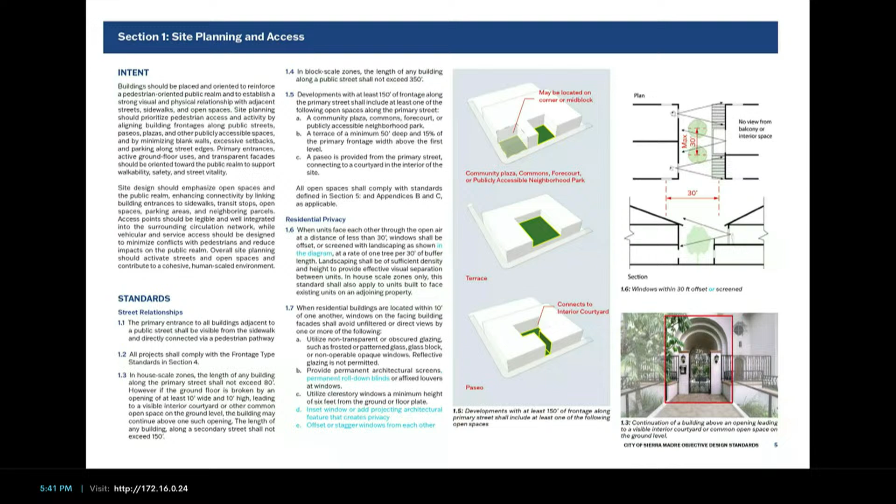Any questions? I think that's an elegant solution. Thank you. Good.

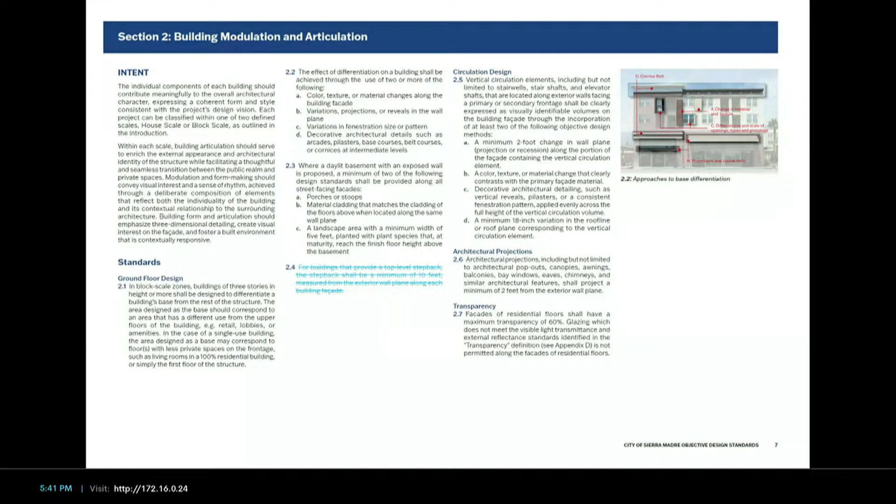Okay, so on to section 2, building modulation articulation. On this page here, we removed the step back, the minimum 10 feet if a step back was provided. So that's been eliminated.

And then on this page, okay, so 2.8 there now says: minimum of 1 variation in wall plane depth within a block scale zone for every 50 feet of facade length along the street. This is in response to your overall comments about length, width, and depth, and it not being clear in all circumstances what dimension is referred to by the length, what dimension is referred to by the width, what dimension is referred to by the depth.

We tried a few different ways of trying to solve this. We tried to first create definitions for each of them, but I'll say, even though it seems like it should be very straightforward, it's really not. So the best strategy we arrived at was simply to add clarifying language everywhere a dimension is referred to that might possibly be unclear. So in this case, it's 'every 50 feet of facade length along the street.'

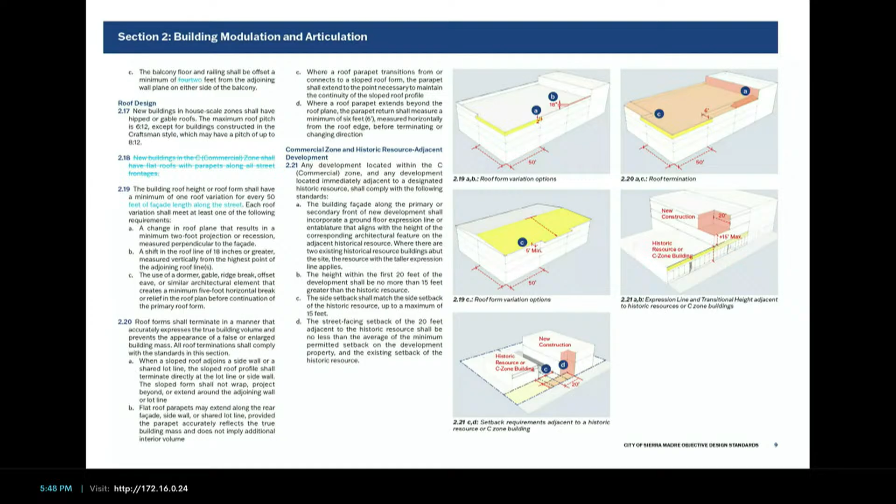2.18 removed the flat roofs from the commercial zone—that's clear direction from you. 2.19 is a length, width, depth comment.

And in section 3 here, 3.8D, there's discussion about composite materials that mimic a natural material. We removed that standard in general—we removed the relationship prohibiting materials that imitate natural materials. So now this is purely about material, and it prohibits vinyl siding and EPS panels.

Eric, I'm not sure if there's anything else you want to say on that. No, other than—yeah, so the two materials identified, the reason we're recommending to keep those is because over their lifetime they're prone to cracking, fading, and deterioration, as opposed to composite materials, as mentioned during the last meeting. We know composite is a more common material nowadays for siding and those types of wall cladding. Great, thank you.

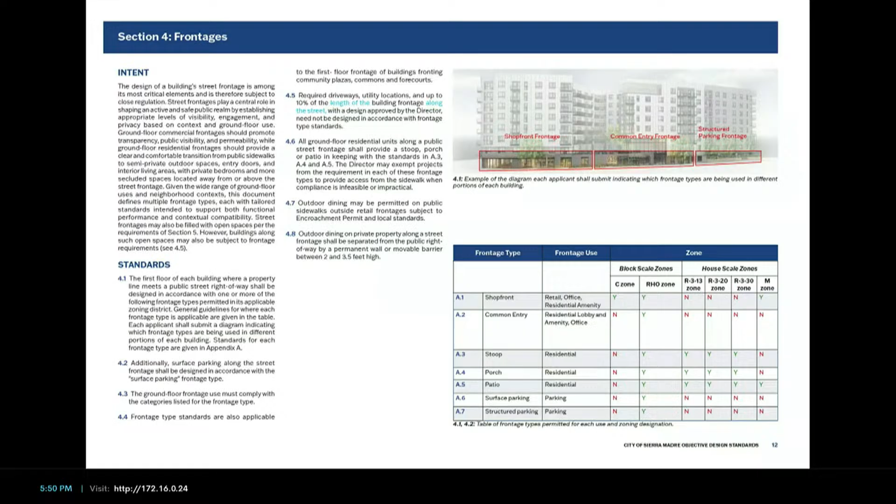Well, don't go anywhere, because we're probably going to start asking you questions. Yeah, so I guess 4.7 is my first question, unless somebody has a question before 4.7.

Give me one minute, because I'm flipping back between notes and the presentation. So I'll ask my question while you're getting that ready.

Yeah, go ahead. Okay, so this is actually for staff. It says outdoor dining may be permitted on public sidewalks, outside retail frontages, subject to encroachment permit and local standards. What does it take today to put a dining area out, like the one in front of the pizza place, or Emmy's, or Monsieur Crepe?

Those vary in types. The ones in front of Casa del Rey and Nano Cafe were all permitted under the Sierra Madre CARES Act and made permanent, but they're no longer available. For outdoor dining in front of other places like Monsieur Crepe, those can be permitted through the encroachment permit, and we do have an outdoor dining program for that. So it's basically you commit to keeping the area clean and you get a permit. Yes, okay, great.

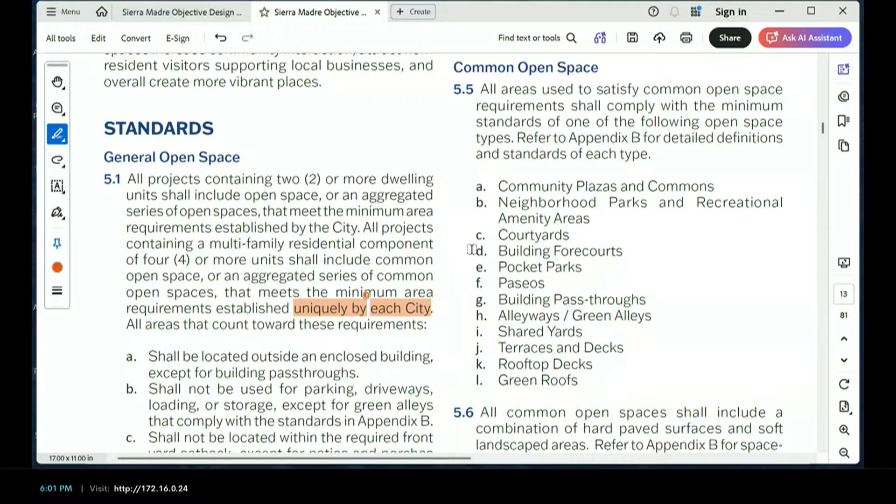5.10 is my next one. I have one for 5.2. It says all open spaces that count towards the minimum area requirements in 9.1. I went to 9.1, and that's about commercial loading. It's updated in the new version, sorry.

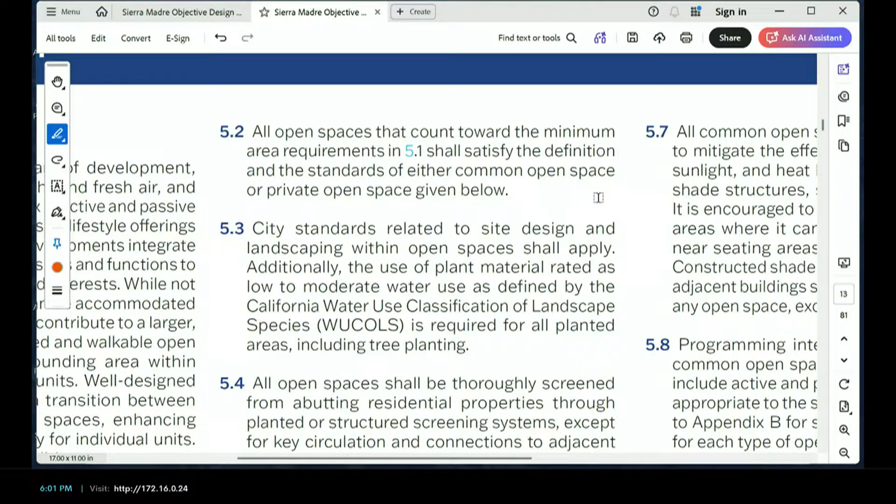Again just a formatting and consistency issue, and I did not double check myself on this, but in 5.1A I'm not sure we're consistent, but I'll throw it out. I think in the appendix we have defined terms, and I'm used to seeing defined terms capitalized in our documents. I know there's a separate ODS document, but I think pass-throughs is a defined term. I didn't go through the rest of the document to figure out where things were defined or not.

I'm newer to the commission, but I think we tried to do that. I remember it being the other way, honestly. Is it the other way? I'm like, why isn't that capitalized? I wish it was, but it isn't. Historically our code does not recapitalize definitions. Okay, I retract my statement. I've been wanting to change that forever.

It's somewhere in 5.10, I think we may have reversed that. It says no more than 25% of the overall common space shall satisfy, but then in house scale zones, at least 25% of the overall common open space area requirements must be met through ground level open spaces. But in house scale zones there would be almost no rooftops or non-ground level open space, so I think maybe that's supposed to be 75%, not 25%.

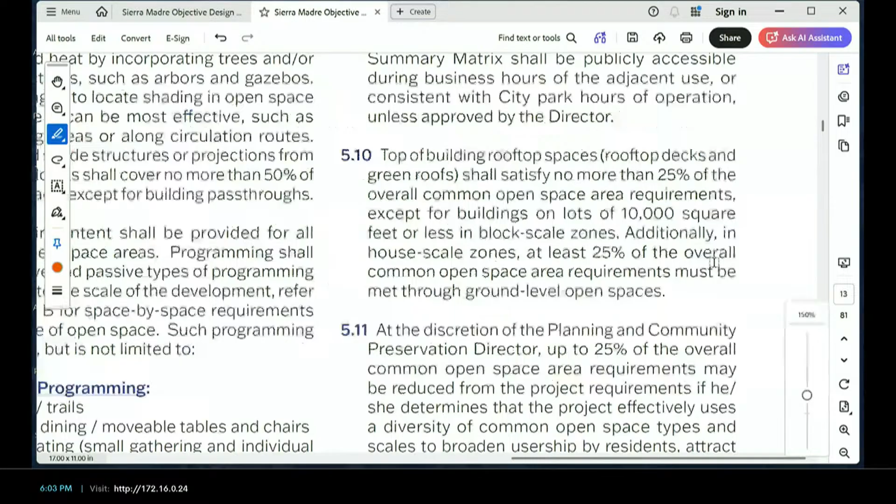Well, you could, in house scale zones, if you go to the next page you can see which open space types are allowed in house scale zones. You can still have balconies in house scale zones, terraces, decks, rooftop decks, green roofs. So I certainly get your point, and I'm certainly willing to consider changing that, but it does reflect our recommendation.

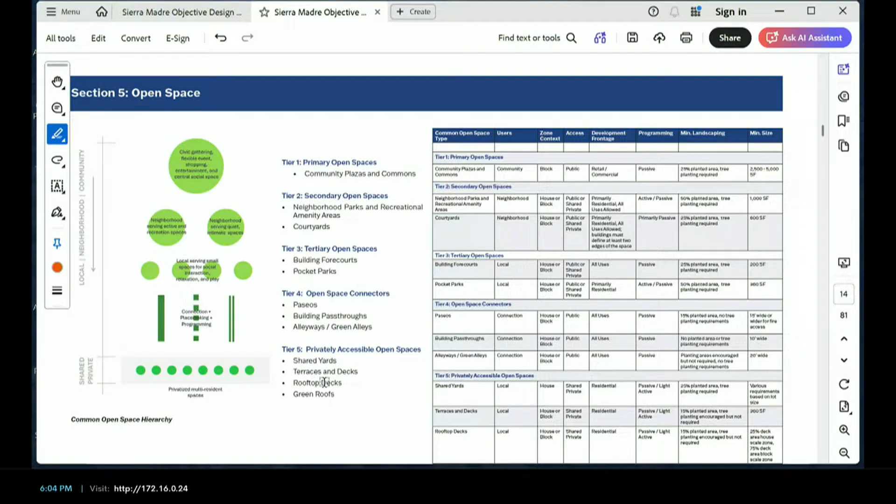So if you have 500 square feet per unit as your open space requirement, 125 square feet per unit needs to be on the ground level.

That feels backwards, so what you're saying is for 500 square feet of open space requirement per unit, that means you could have balcony space for 375 feet of it?

Or, I'm not sure you'd have this type of building here, but let's say you're in the R330 zone, building at 30 units an acre, maybe it's a density bonus project and you're building 40 units an acre. Could be a podium project. You could have a podium deck for 375 square feet of common open space, and then 125 square feet on the ground in the front as a ground level courtyard.

Does that 500 feet per unit apply when there's a density bonus and high density building?

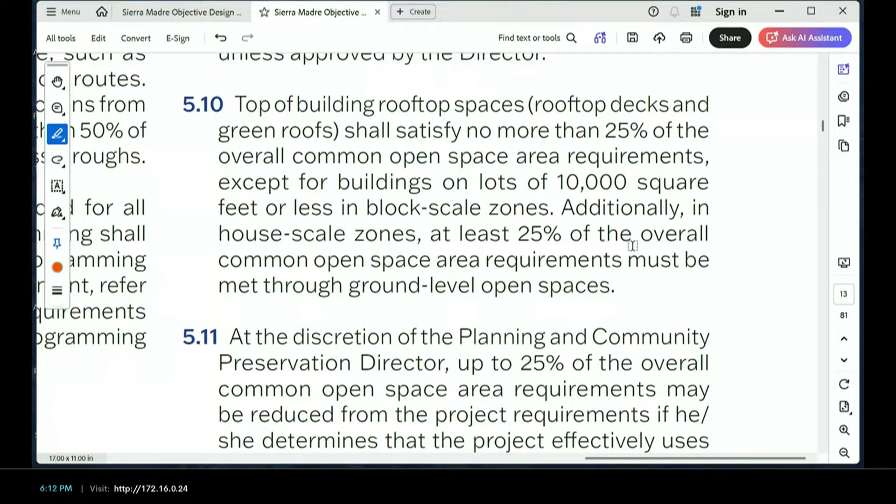And then what percentage do you recommend? I would like 50. That sounds good to me if we can. If we're good with doing that. I think so.

So that would relax the current standard from R320 and R330, because you could say R320 and R330 currently require 100% - under the municipal code, they require 100% of the open space requirement to be met on the ground level.

So basically, on the first part, we're saying if you have a small lot or a big giant block scale zone, then you have to have 75% on the ground, right? And if you have a medium-sized one, we're putting 50 on the ground. It seems kind of strange to me that if you have a really small lot, 75% has to be on the ground.

Then the middle size is 50, but then the big size is 25 or 75 again. Seems like it should be a line, not a hump. Does that make sense?

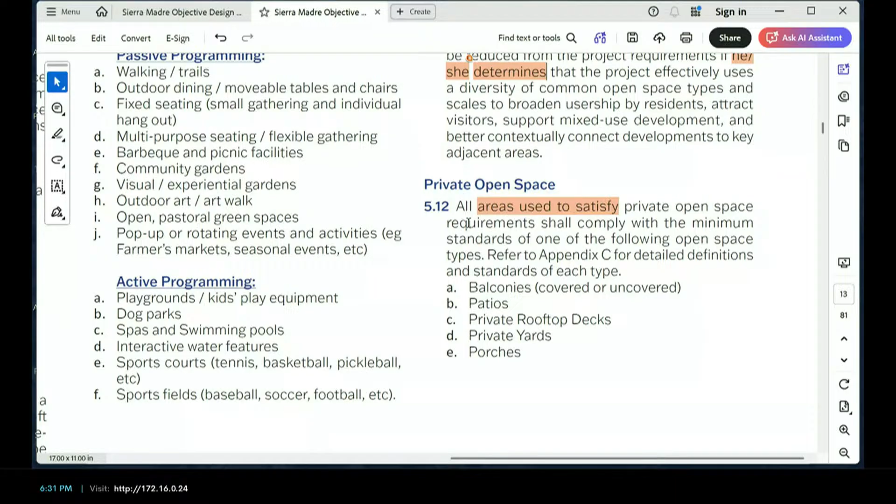Joshua, are there... I guess that would cover it, yeah. Even if there are private open space requirements in block scale zones, that would still cover it. I think we're covered there. 6 is my next one, 6.3 is my next one.

Can you help me understand what 6.3 is trying to get at? Yeah, 6.3 is trying to encourage individual unit entries that are located along a pedestrian network connected to the street. So what it is not allowing is ground floor units being accessed through an interior hallway, double loaded corridor on the ground floor. But it says internal pedestrian walkway, so wouldn't that mean that you can take a walkway to the internal pedestrian walkway and then access it? Yeah, well, it says the intent is outdoor, so landscaped internal to the site.

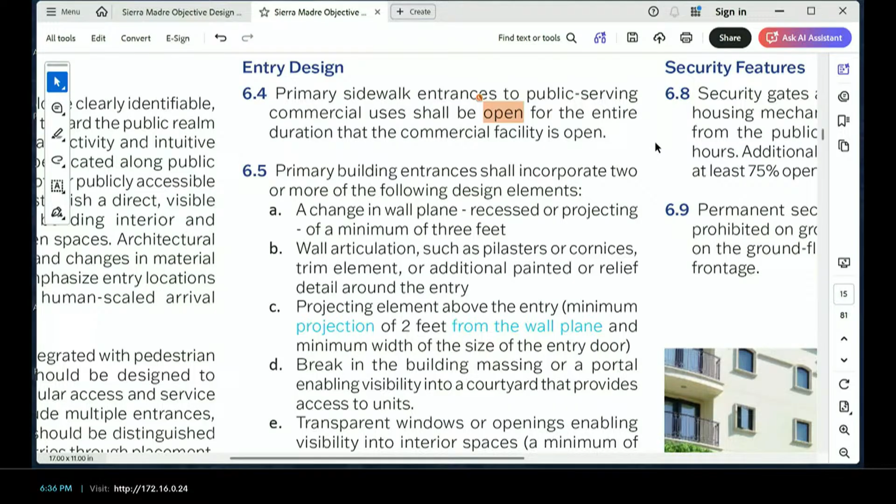I had a question about 6.5E, unless we have something before that. For all of 6.5, it felt like this was for non-house scale. Because I'm trying to understand how you would have more than one of these in a house scale?

You want to take that one? So let me just briefly go through each one of these. Change in wall plane, recess projection, minimum of 3 feet, wall articulations such as pilasters or cornices, trim elements, or additional painted or relief detail around the entry.

So let me go on. Projecting elements above the entry, a minimum projection of 2 feet from the wall plane and a minimum width of the size of the entry door.

Break in the building massing or a portal enabling visibility into the courtyard that provides access to units, transparent windows or openings enabling visibility into interior spaces, a minimum of 50% within 20 feet of the entrance, and a landing deck or stoop with a minimum depth of 6 feet and minimum width of 8 feet.

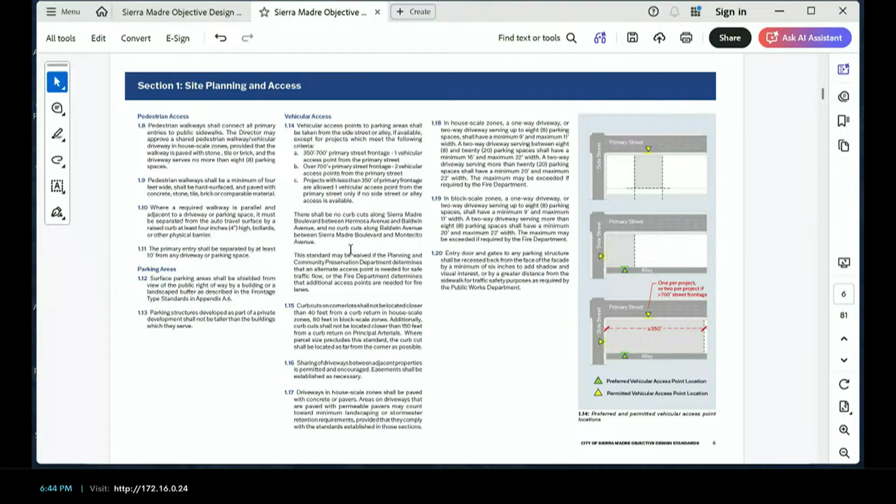How would we phrase that? We'd call it some kind of frontage? I think actually in section 1 there's already a standard that talks about the primary entrance: the primary entrance to all buildings adjacent to a public street shall be visible from the sidewalk and directly connected via pedestrian pathway. It's 1.1, so that's already saying what it is.

So the question then becomes, I don't know what code governs having doors unlocked. I don't think we have such a code. That sounds like a fire code, a safety requirement. Yeah, I'd leave that to the fire department because that sounds like something that would exist under the fire code.

So would it be prudent to say open, as in transparent and not obscured? I think that's already in there based on the transparency guides, right? Yes, the intent here is that it be accessible to the public, accessible as a public entryway.

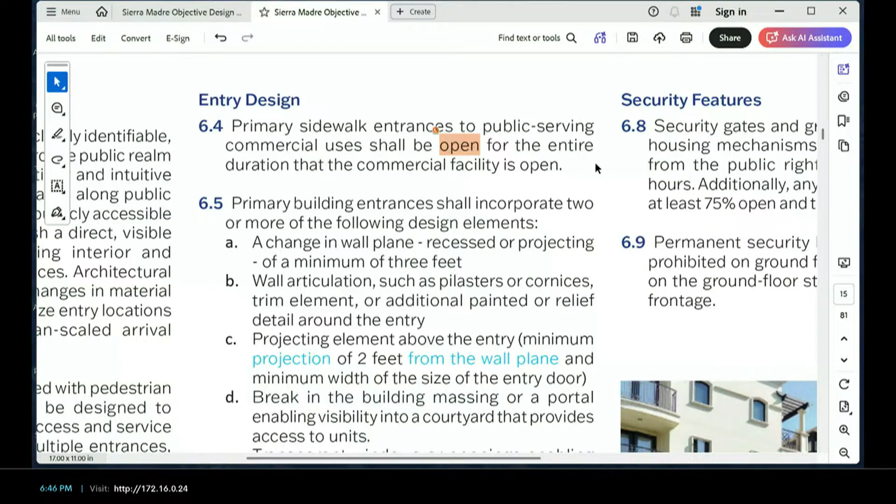Commissioner Brennan, I think you had some questions? It was actually to that point, 6.5E, the portion in parens. Maybe it's just me, but where it says a minimum of 50%, I didn't know what the 50% was referring to. We're trying to have transparency into the interior space, in the entryway, but 50% of what?

I was trying to see, it's 50%, 50% of the facade, or the ground floor facade? So it's defined in the same way in other parts of this, in the frontage standards where it talks about a minimum transparency, and there's a definition for that in the definitions section. The intent here is to use that same definition here.

Is that clear without any other context? Maybe it's just me. It may just need to say a minimum 50% transparency. If you had the question, I think we should clarify it, right? I would say a minimum of 50% transparency of the facade within... okay, thank you.

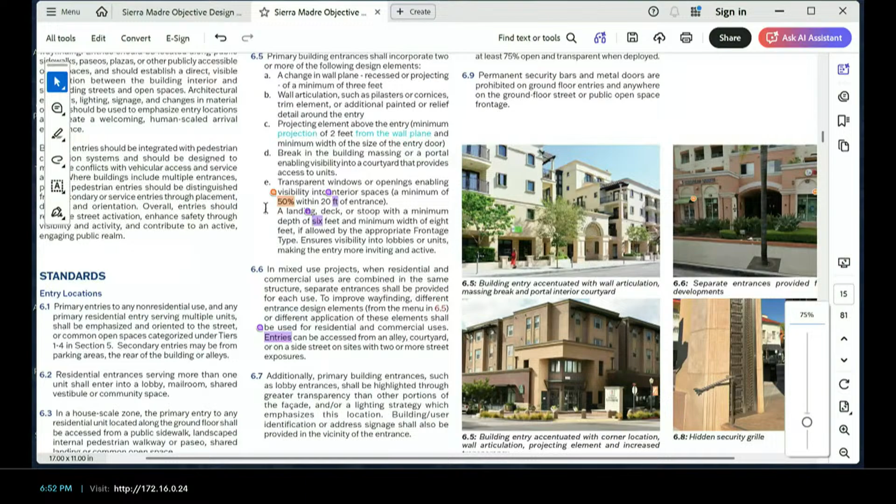I don't think landing or deck have exhibits of their own, but stoop does, so I would just make sure that doesn't conflict. Yeah, those are actually larger than the minimums for the stoop. It's not larger than the maximums, but I think the intent was to make it more pronounced.

That's probably more of a block scale thing, thinking about an entry, like a lobby entry into multiple units. If we're thinking of house scale zones, just single unit entries, I agree that just complying with the standard, the frontage standard, is sufficient.

I guess it's just one of the many things you have to incorporate. If you don't incorporate that, you find another one, so it's not that important. I withdraw my question.

6.8, security features. Is a privacy screen in the house scale considered a security feature? Because it says security gates, and I think of those privacy screens as kind of gates, but I just wanted to get clarity.

Like a screen on the window? No, I think they're called security screens. I don't know what they're called, but they're like reinforced metal, not like a screen door. It's super thick, and it has a lock on it so you can leave the door open and nobody can come in. They usually have a deadbolt and a metal frame that reinforces it. So is that considered a security gate?

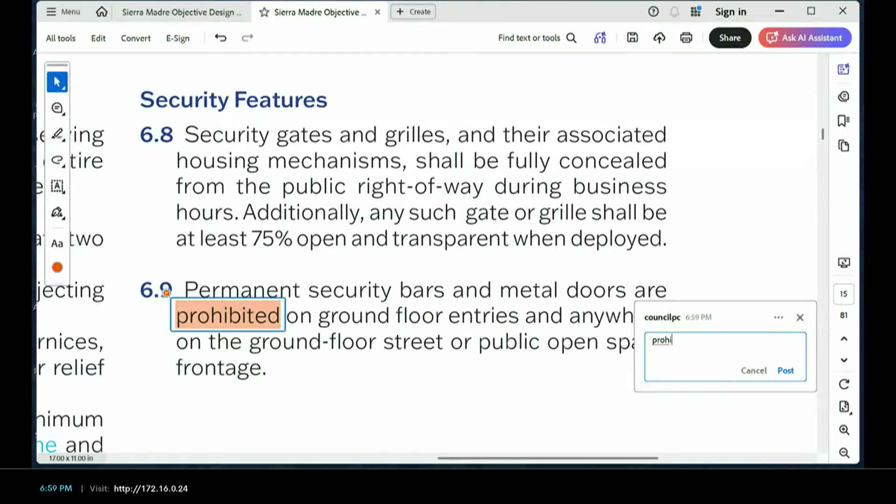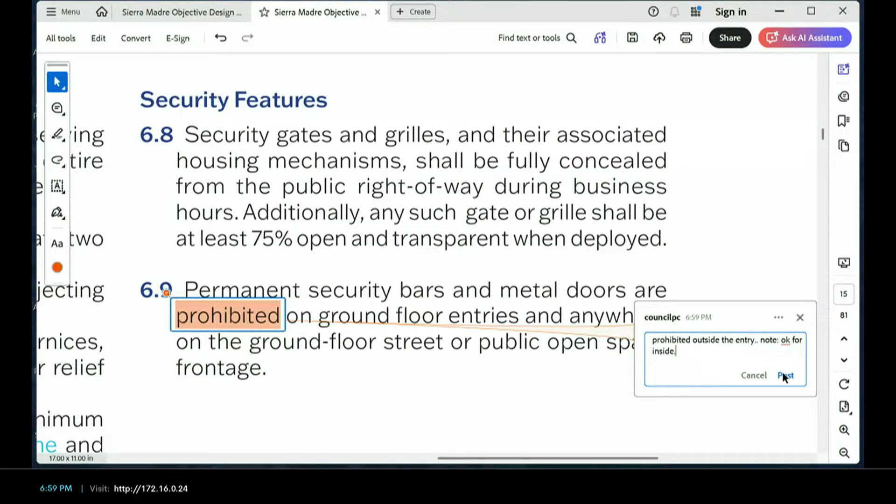Seven two B is my next one. Is this just a standard that people use? Is there some logic behind it? Why would we allow any of it to be pointed up?

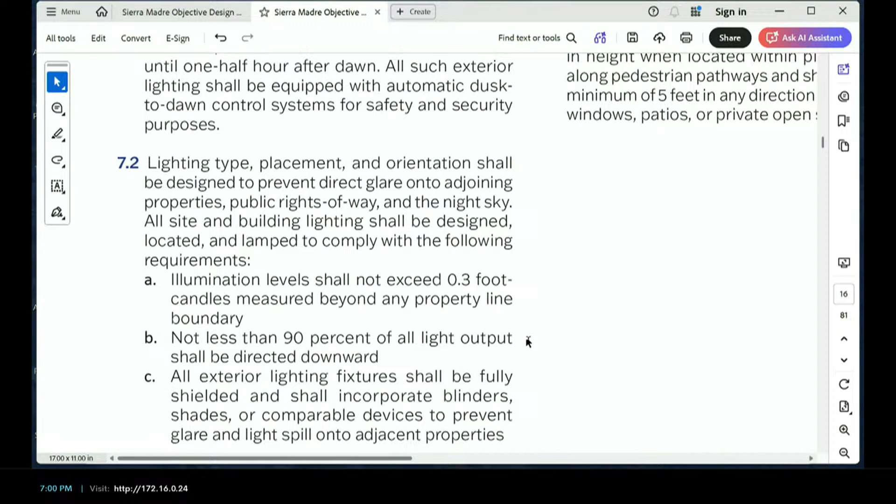Well, it's hard to determine that there is zero, that you cannot see any light from an exterior light, even as it looks in the diagram. So I think that was the idea there. It's just trying to be - when people write a simpler standard of all light shall be directed downward, is it really 100% effective? Not sure about that. Is this the standard, the 1 to 3 foot candles?

Is that like a standard somewhere? And how would we enforce that, is that an enforceable number with like a machine, a meter? Is there a foot candle meter?

Typically with new construction residential, there's a photometric diagram that's made for the project to ensure that light is emitting on pathways to entrances, and the electrical engineer will have to develop that. Typically, the minimum requirement is 1 foot candle, as far as our research goes, we've determined.

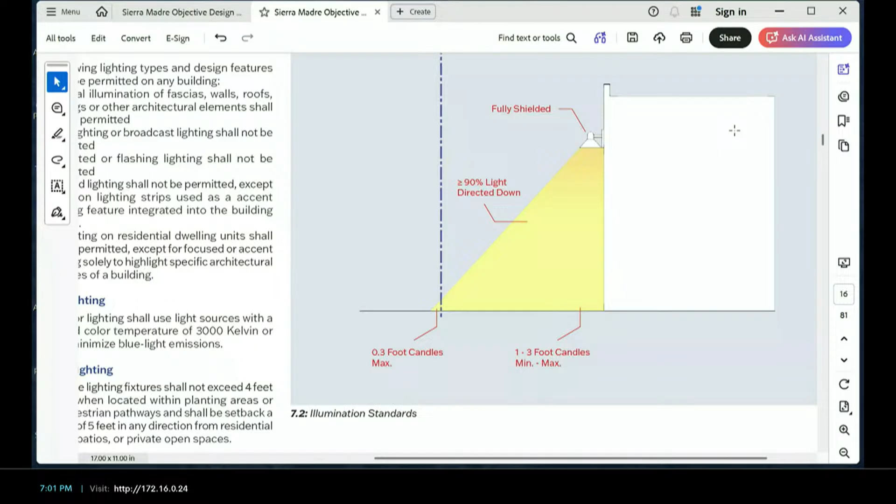I mean, if this is a standard - I tried to figure it out and I got lost. So if this is just a standard calculation or a standard procedure, I don't measure foot candles often.

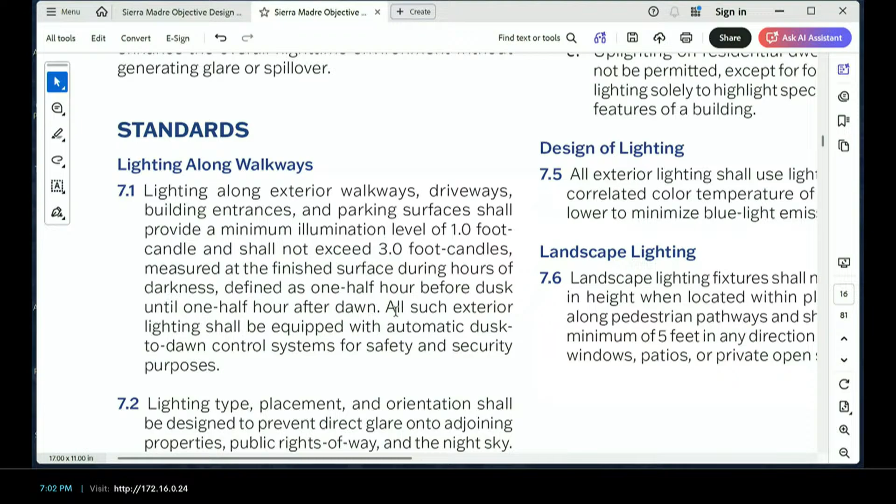I guess I was trying to also understand the last sentence of 7.1, all such exterior lighting shall be equipped with automatic dusk to dawn control systems. How's that different than 7.3 that says all exterior lighting shall use those same things?

I understood 7.3 to be differentiated, such as motion detectors. So 7.1 is lighting along walkways, and it sounds like it's subject to the overarching exterior lighting, so I didn't know why we needed that same sentence in two places.

7.3 just elaborates on the 7.1 requirement, since they will be providing the automatic shut off and turn on light during dusk - half hour before dusk, half hour after dawn - then those systems need to include a sensor, timer, motion detector, or equivalent technology.

So it's one thing to install it and have it in place, it's another thing to require its automatic system and how those need to work. So we could take it off of 7.1 and just keep it on 7.3 to avoid redundancy - well, that's the intent.

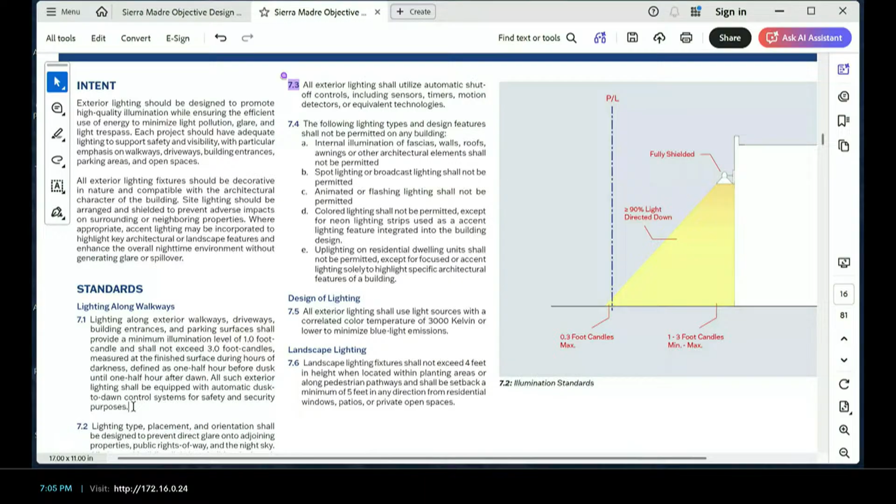Can I ask a question? I'm just wondering, is this section titled correctly? So when I read 7.2, we have standards, and then it says lighting along walkways. And the way it reads right now, lighting along walkways applies to 7.1, 2, 3, and 4, using that subheading. But I'm not sure that's the intent. Seems to me that 7.2 is general purpose, not specific just to walkways.

Is that correct - exterior lighting? Yeah, that's right. Why don't we change the title that's there. That's a great catch, just change it to exterior lighting.

Because you could have exterior lighting and still have landscape lighting, I think it's kind of a subset of exterior lighting, but that would be all right. Or should 7.6 really be part of the new exterior lighting section? I think we might be able to consolidate and eliminate all the subtitles from this, since it's all called exterior lighting. You don't need any of the subtitles. Sounds great.

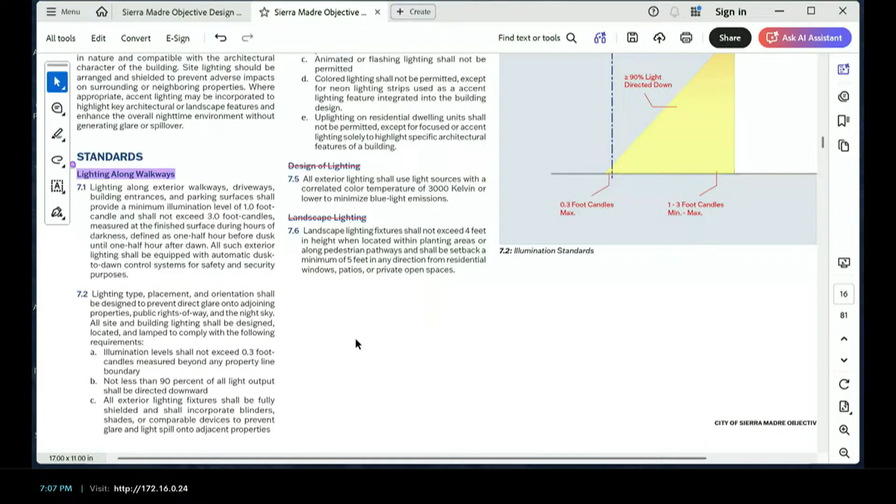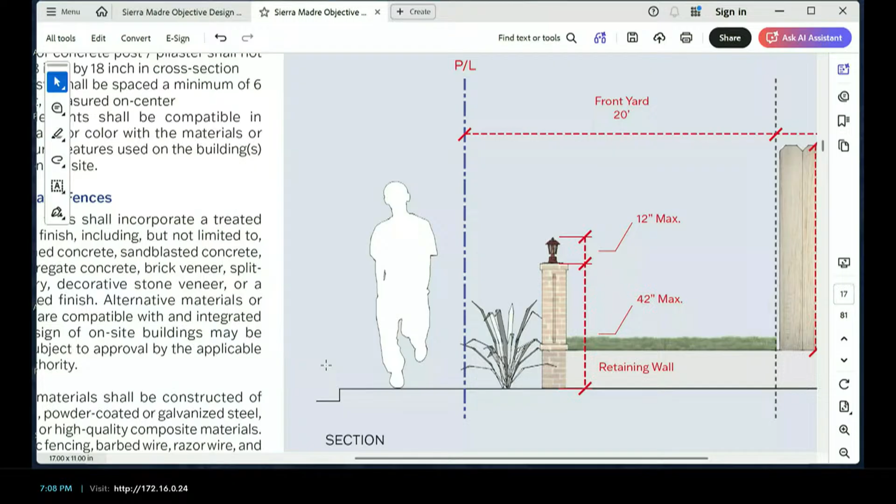I could see how that could be interpreted as a landscape light since it's lighting some level of landscaping in your front yard. Right, going back to 7.6, the intent is lighting that's uplighting or downlighting - uplighting towards landscape features such as trees, in a courtyard or front yard space, or downlighting onto walkways such as step lighting. Typically we'd want those... because if too high it defeats the purpose of landscape lighting. I think of it as maybe even less than that, like 2 feet. Honestly, even those Home Depot solar stick ones that you stick in the ground, I think they're a couple feet or so.

So as you described it, uplighting for oak trees - are they saying that you can't put... I mean, oaks are, people light their oaks. My lights are about this high off the ground. Some people run them all the way up the tree so they just get certain areas of the oaks. Is that what this is trying to prohibit? But that's not a lighting fixture, right? Are you talking about like twinkle lights? No, I'm talking about an actual light mounted up higher on the tree, illuminating up. It's to keep it away from these high places to prevent public eye visuals of spotlights. I don't think we're supposed to do those uplights anyway, for one of our codes, the dark sky lighting or whatever it is, right? I was wondering about that.

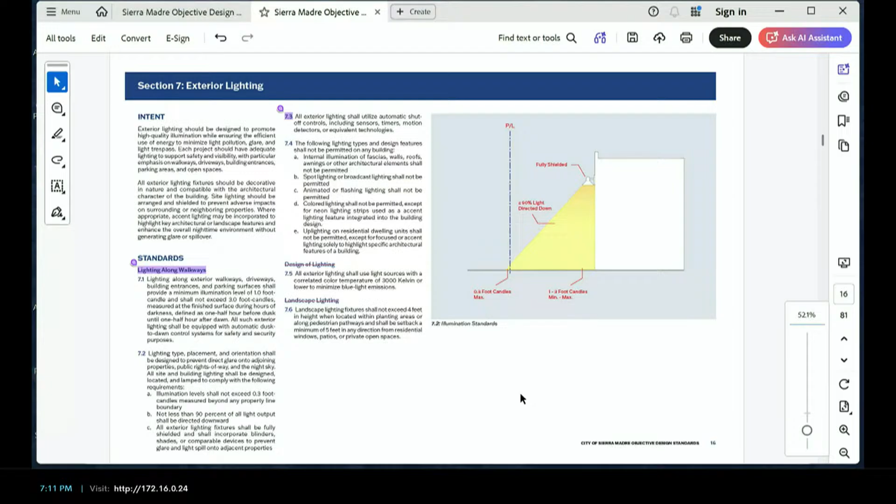I don't have much, do you care, do you want something to change there? No. I did read that it's within the planting areas, and that kind of made me think it was located within... I think I just saw along pedestrian pathways, and that's just what the picture looks like to me. I know it's a different section, but I read that and then I looked at the next page and went, well, that's not that. But I'm fine with it. If we just call that it's not a landscape light, then I'm good - takes my whole thing away.

7.4C, animated or flashing lighting.

I assume this lighting description is for permanently attached fixtures, not holiday lights? Right, right. So these are permanently applied lights to walls, or projection lights.

And internal illumination of fascias, walls, roofs, awnings, or other, is that like an uplight inside something? So internal illumination, for example on your roof eave, if you install lights mounted on the underside of that eave and flashing that light, even if it's pointed down, it creates high up light that's not encouraged because it glares onto people's windows or neighbors. That's what internal means, under the eave? Yeah, so we intended to avoid light fixtures that are tucked under.

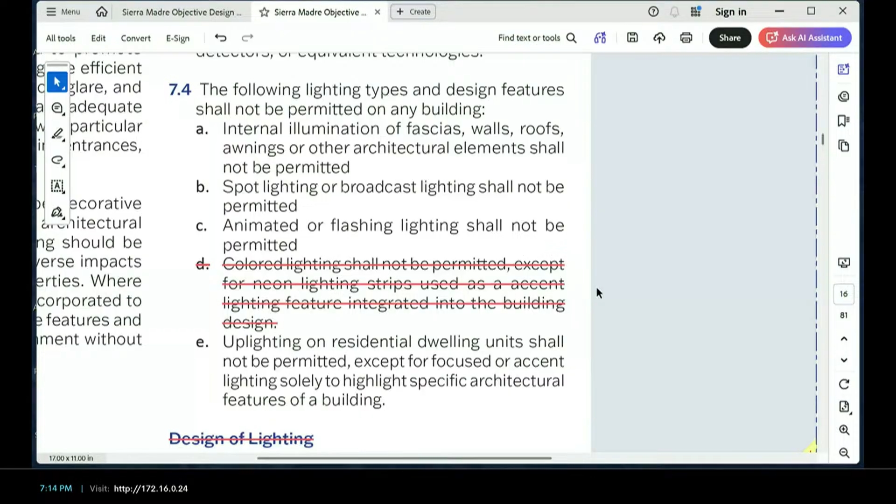Do we want to be specific? I know we're talking about colored, and we have color temperature in the next section. Yeah, that's why color is used as a specification of what's okay. Since we specify what range it has to be in, we could get rid of colored, because it wouldn't be in that range, right? Because Kelvin refers to color. Yes, so it was 3,000 Kelvin too, right? Yeah, I was just trying to get that, what color that is. That's kind of a little bit white, yellow. Nice and warm. Okay, daylight. So we're good with striking D altogether? It's daylight, yeah, okay.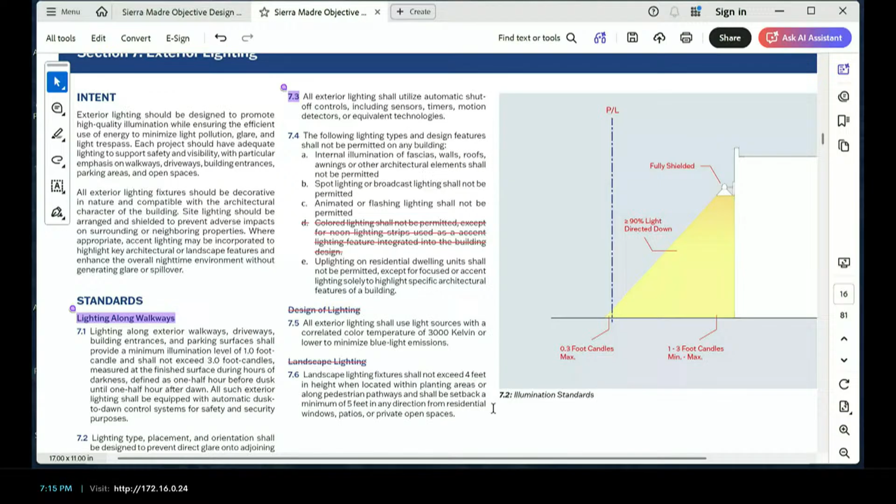Oh, I don't know if we're, oh yeah okay. Sorry, yeah that's good. That was all I had in lighting. Anybody have anything else? No, that's it.

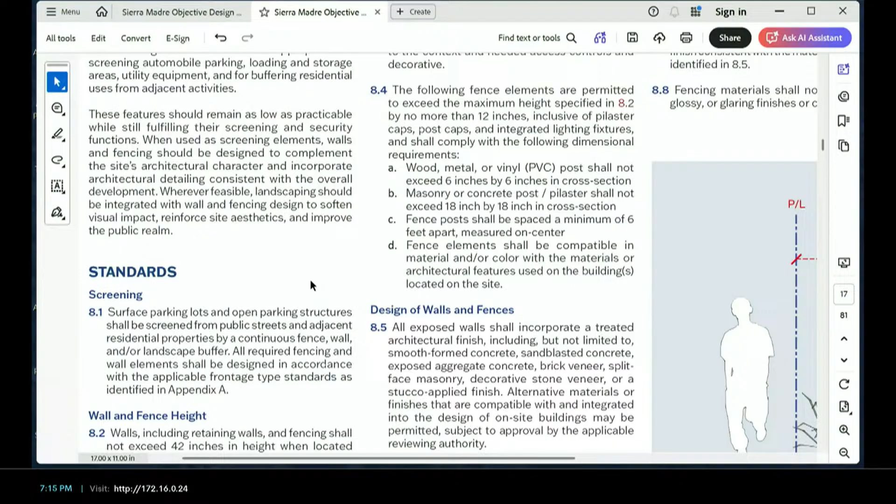Walls and fences? I didn't really have anything. I had some for 8.4, but it was the same thing as the one before.

I do have one for 8.6, and this is going to drag into the next area of landscaping. We have 8.6 that says all fencing materials should be constructed of treated wood. I think most of town is going to be subject to CAL FIRE restrictions for zone zero. Are we trying to include any of that in here, or not? Having any combustibles within 5 feet of the home. So if we're suggesting wood, it's treated, I'm assuming that means pressure treated, not fire rated treated.

So I think your exterior fence can be wood? Yeah, as long as it doesn't come within 5 feet of the house. Like if you have a garage gate or a gate next to the house, that's supposed to be non-combustible. So fire code will always trump our codes. Okay, cool.

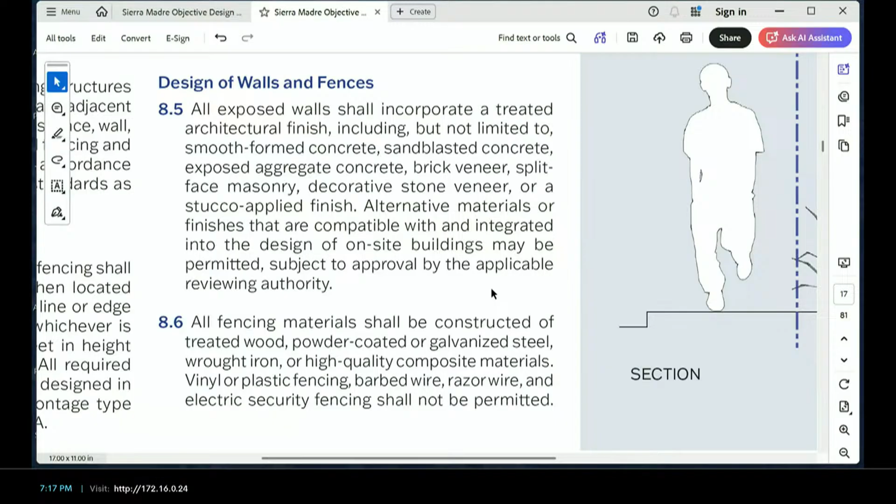Then I have nothing else on that. I don't know if it would help, because that standard isn't really highlighting fire rating treatment. Right, pressure treated, it doesn't. It's more about the aesthetics. Right, it doesn't address it, and when we get to landscaping it doesn't address it at all, because we're suggesting plants right next to structures and things like that. But if that's going to be overwritten by fire code, I don't think we need to stress that out and put it in here, so I'm good with that.

One very minor suggestion, 8.3, the last sentence reads a little awkwardly because of the sentence structure. The word 'decorative' at the end is kind of dangling. I think it should be something like: the fencing shall be visually transparent, decorative, and appropriate to the context and needed access controls. This is just moving that word, it gets kind of odd.

Then I noticed on 8.5, and this might be okay because I only just looked at how we talk about the applicable reviewing authority. I didn't like it either the first time. It's the first time we use that language. It seems to be in the appendix when it talks about maybe it's the planning commission, but it seemed a little unclear, whereas in other sections it was clear that it was the director or what have you. So I just didn't know if we should seek more clarity in the text there.

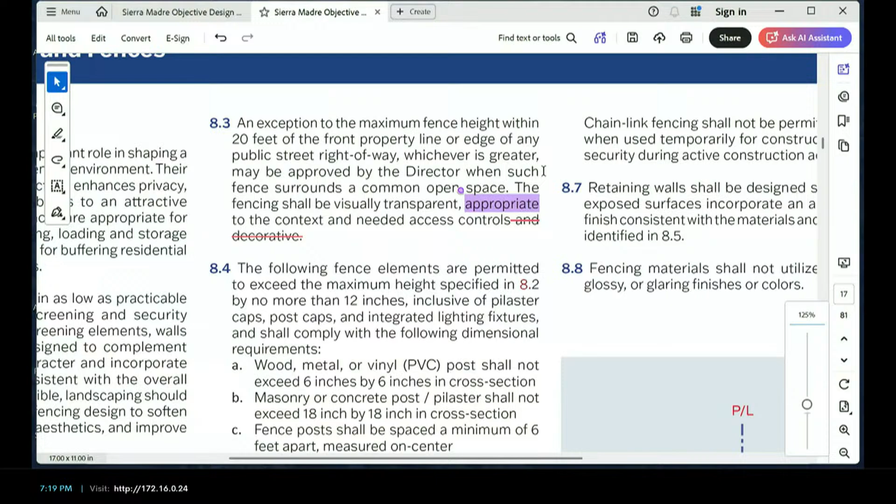I guess the one reason here in recent history for applicable reviewing authority would be when we do certificates of appropriateness and historical homes, like when we approved the fencing type for the home on Baldwin. So that would be when it's not code or director driven, but us. I don't love the wording of it, but I don't have a good alternative.

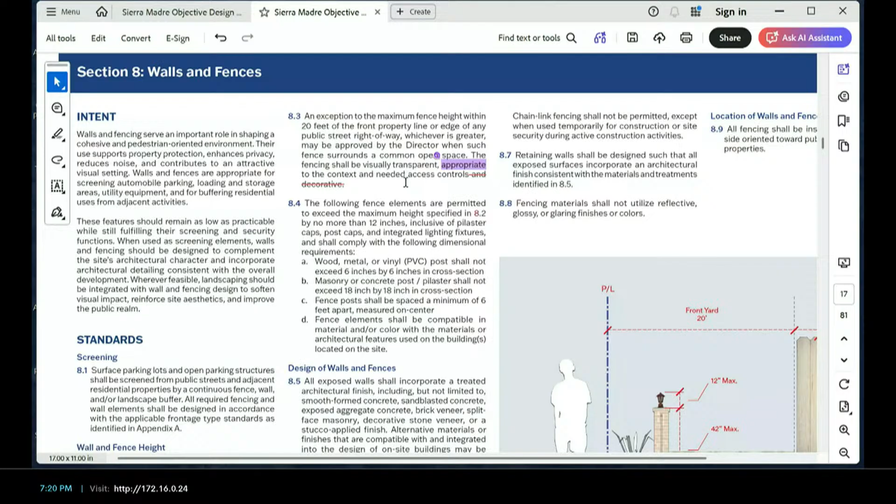Do you have a change to suggest? No, it's again just seeking consistency and clarity. I think that's okay. It's like, we got rid of vinyl siding in one place, but we got vinyl fences here. I don't know, it's not that big of a deal to me. I'm fine with that.

I'm curious if we're even allowed to alternatively use vinyl fencing, because it burns pretty well. Well, there's the fire thing again. Yes, vinyl fencing is allowed, not encouraged, but allowed.

Right, yeah, it's not permitted in 8.6. Yeah, that's where we get into the EPS walls and stuff too. There are other bad things than expanded polystyrene as far as fire code, but I guess we just leave that to fire code instead of trying to make an exhaustive list of highly combustible materials that you can side your house with.

Well, if we remove vinyl from the siding, do we want to remove it from fencing as well? I think I see a lot of vinyl fences, honestly. The way it's worded is that vinyl fencing is not permitted under these objective standards. Yes, shall not be permitted.

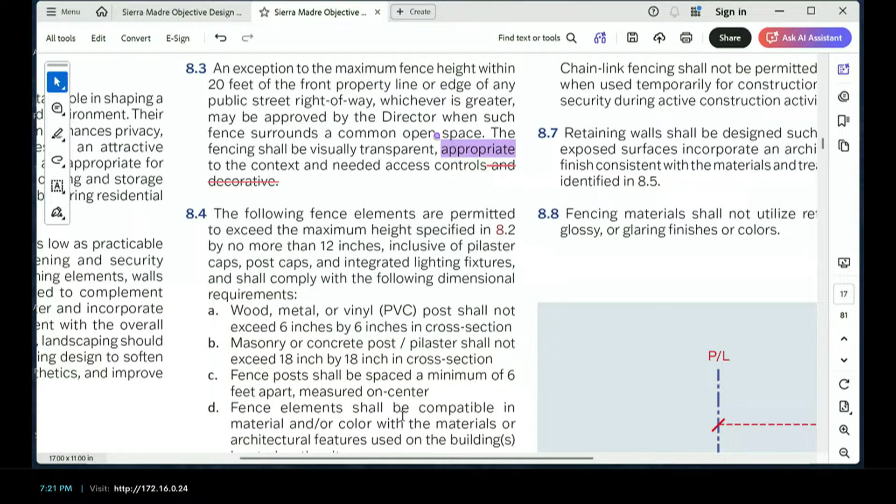Well, then we should go back up, because it says shall not exceed. Wait, so we can have a vinyl PVC post? Oh, post - you can have vinyl posts, but not fencing. Oh, that's kind of silly.

Do you see a lot of vinyl fencing? I don't know, I see a lot of white fences that look new, and I don't go touch them to see what they're made from, honestly. So we just need to align the two. I don't have a preference.

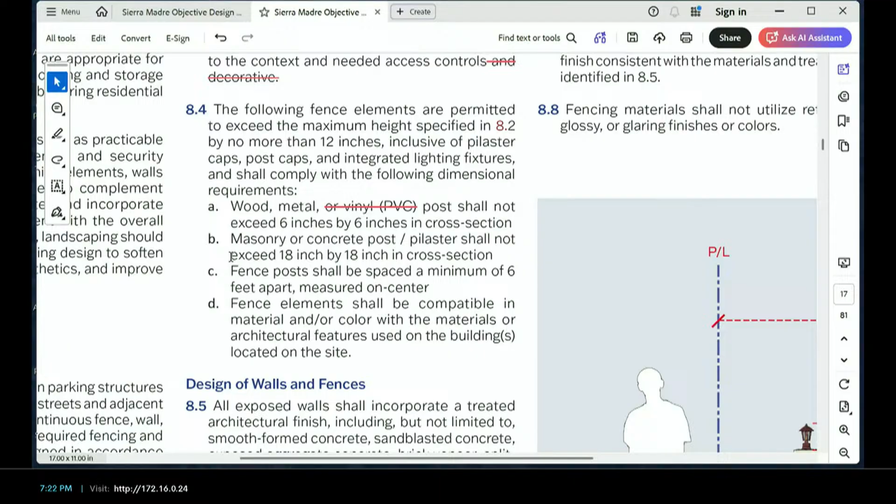If we're gonna get rid of it, strike it here in 8.4 - if we can't have vinyl fencing, then we shouldn't have vinyl posts. Yes. Okay. You want to add anything to it? So strike vinyl PVC from 8.4A. Okay.

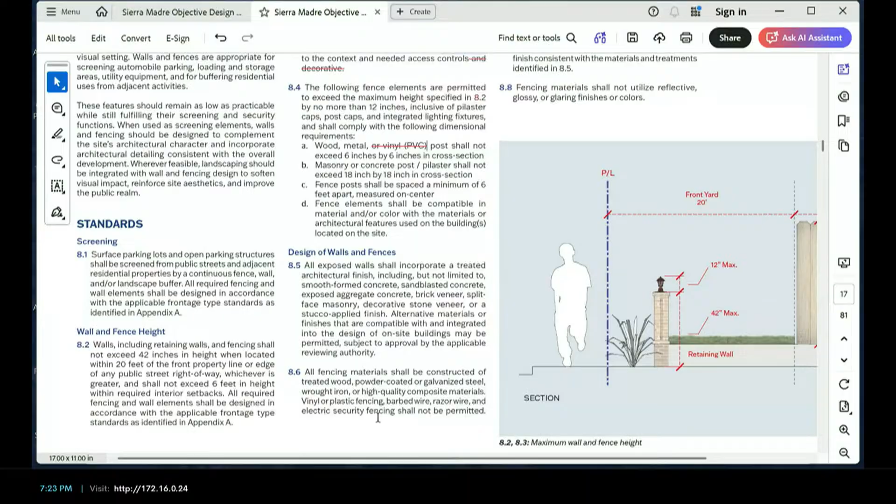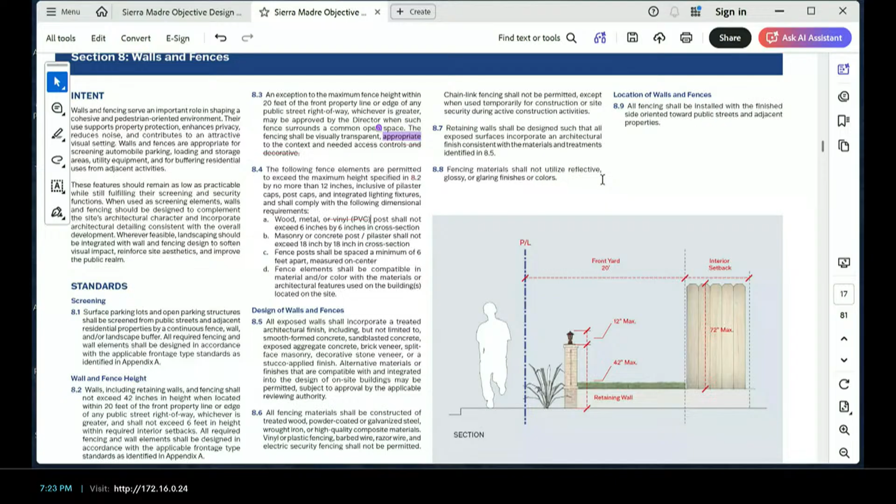Okay, so 9.1. Maybe I'm misunderstanding this, but it says non-residential uses. Aren't these all necessarily at least mixed use?

Right, the projects which contain non-residential uses, so mixed-use projects. But this says loading areas shall be permitted only for development projects with non-residential uses that exceed 10,000 square feet of total floor area. But none of these are non-residential uses, right?

Well, yeah, I guess we could say it differently, but it's intended to be - loading areas shall be permitted only for mixed-use projects with a non-residential component, excluding office uses. I don't know, I've got to figure out what to do with the excluding office uses there, but by definition, to show up in here as an objective design standard, it's mixed use, right? Correct.

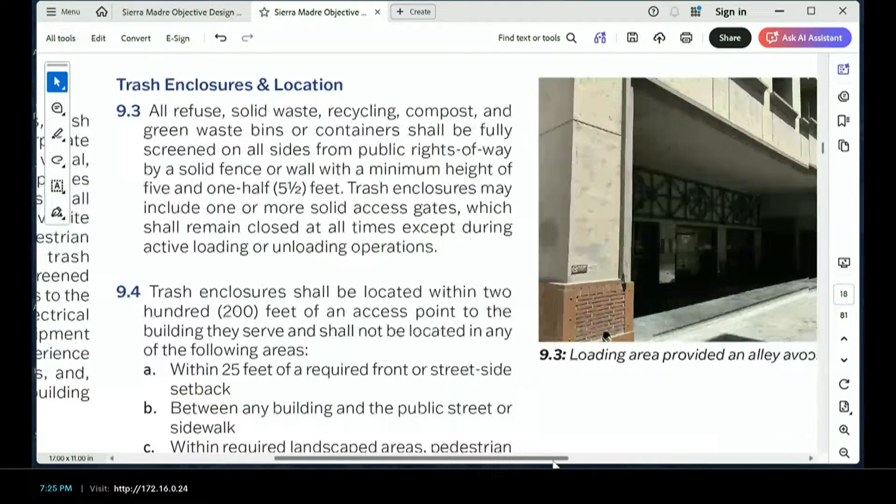So in 9.3, I had a question as to what a parking lot is - is it considered a public right-of-way? No. Public right-of-way is a public street. Or an alley would be that same thing. An alley would be the same thing. Okay, that's true. An alley would be public right-of-way.

But as long as they don't - if I'm reading this correctly, the only time you have to put up a wall around your trash enclosure is if it can be seen from a public right-of-way. So if you put it behind a building, you can just set it there - you don't have to have any kind of enclosure around it. That's what the standard says, yeah. Is that consistent with the underlying code?

We can look into this, but I don't recall there being specifically trash enclosure screening requirements for multifamily.

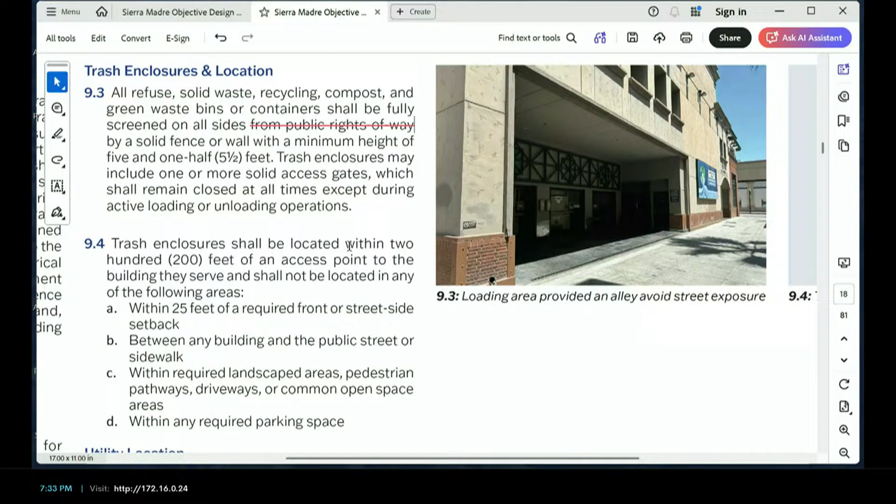Anything else in 9? I do not. Give me one second just to reread something.

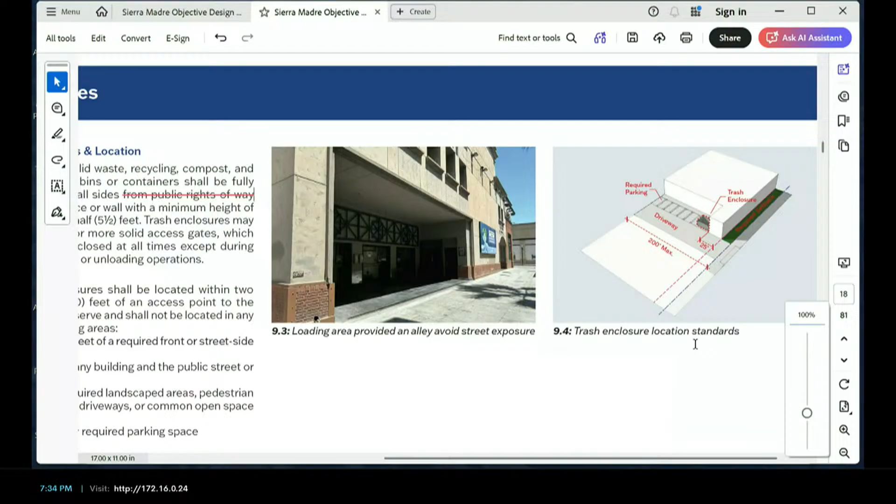I had a question about 9.6. It's in the middle of that paragraph, that section. It reads, if any of these options is prohibited by applicable building, fire, electrical, or plumbing codes, an alternate option shall be used.

I didn't remember us having a sort of option-out without any further clarity. Maybe it needs to be 'or as approved by the director.' Yeah, I like that.

We provided this list of options for concealing, for example, water meter or water heater, gas meter, those types of equipment through the use of screening, landscaping, or painting. But I know there are limitations for certain equipment. Yeah, don't paint your gas meter, you will not be happy. You can paint it gray. Yeah, exactly.

Question for staff here: if it's not allowed under the building, fire, electric, or plumbing code, then the remedy is for the applicant to propose an alternative means and methods that's going to be approved by the building official, right? Not the planning director at that point.

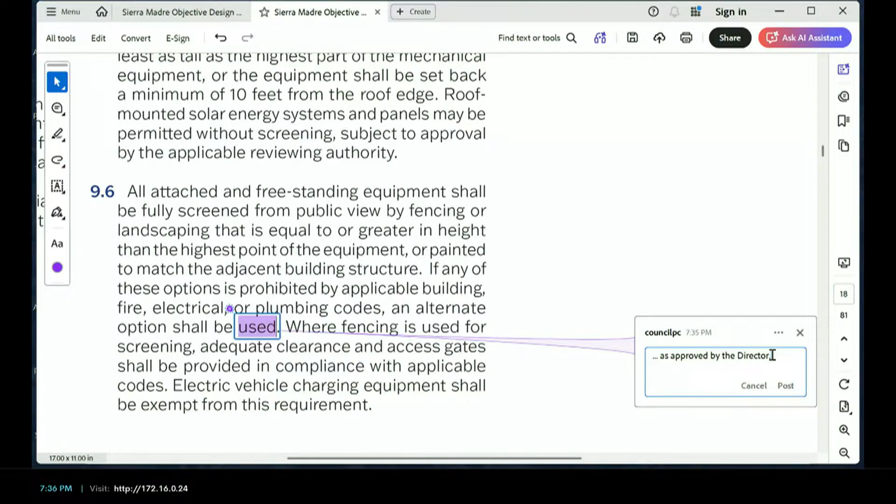All right, anything else? Sorry, just to clarify, is that going to be director or reviewing authority? Applicable reviewing body. Okay. Authority. Sorry, applicable reviewing authority.

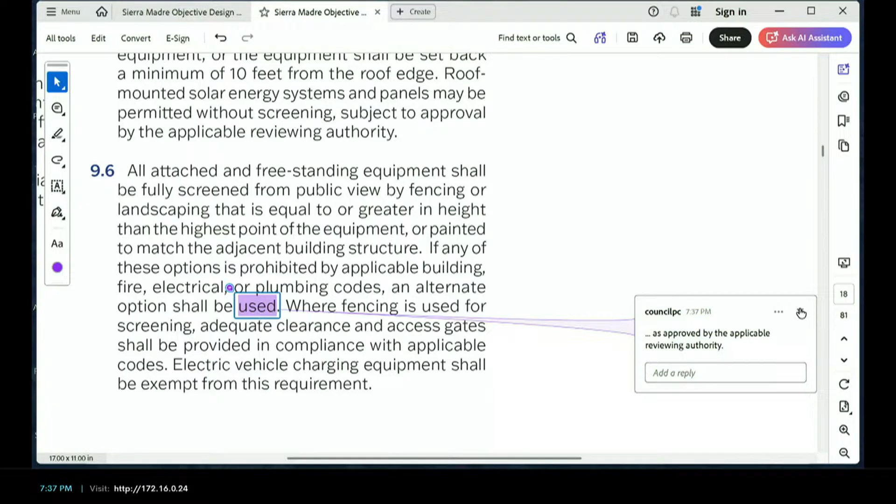Appendix A1, I had a question. It says depth, recessed entries, 5 foot max behind building shop front line. Does that imply that you have to be recessed? No. Okay.

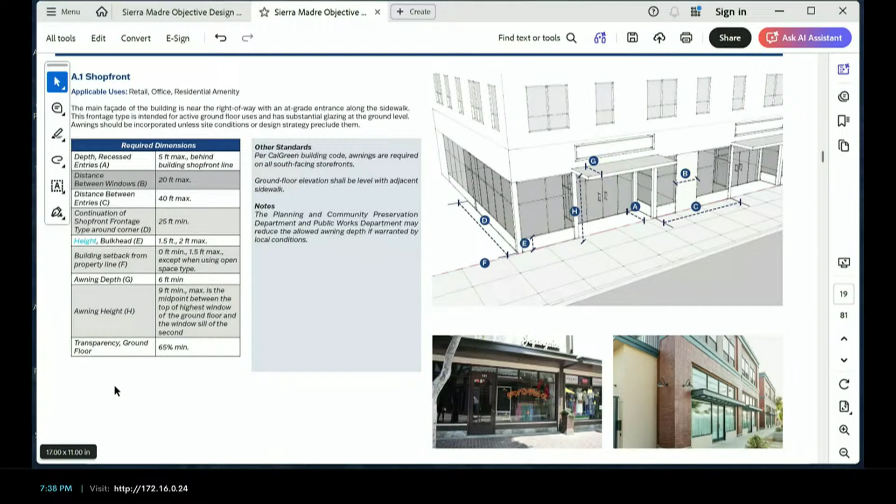I see we're missing a minimum on the height bulkhead. It's supposed to be 1.5 feet minimum, 2 feet max. Yeah.

So the building setback from the property line is 1.5 foot max, if you have a shop front, yeah.

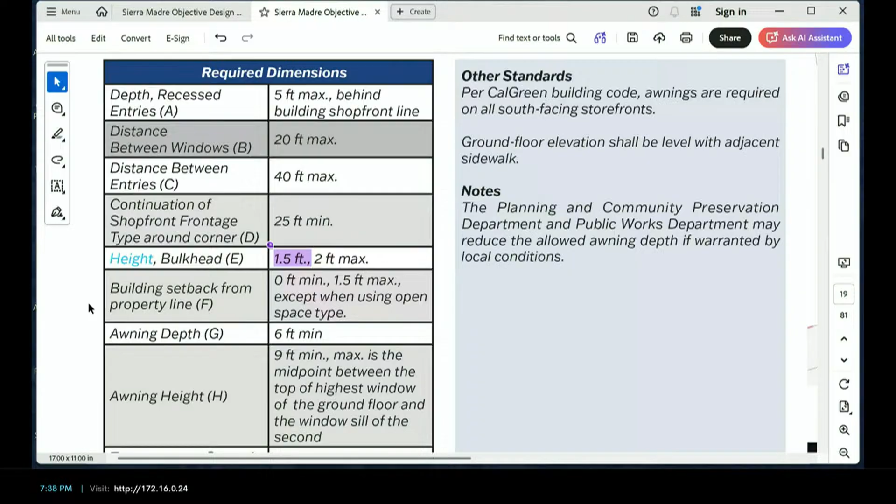If you're in the commercial zone, I presume you pretty much want everything to be right up to the sidewalk, just like every other shop front is. I guess that's the problem, is that we wanted it, but I guess we're going to address this shortly, aren't we? I would propose that we put this — it's the way we're changing it, it does the opposite. It dictates how far you can be.

Where would these buildings be in the commercial and the industrial zone? Is that right? Yeah, it's permitted in commercial, manufacturing, and RHO. RHO? Religious housing overlay. Oh, I forgot about that one. Thank you. All right, I guess we can come back to this one because we can change this one without going to the city council.

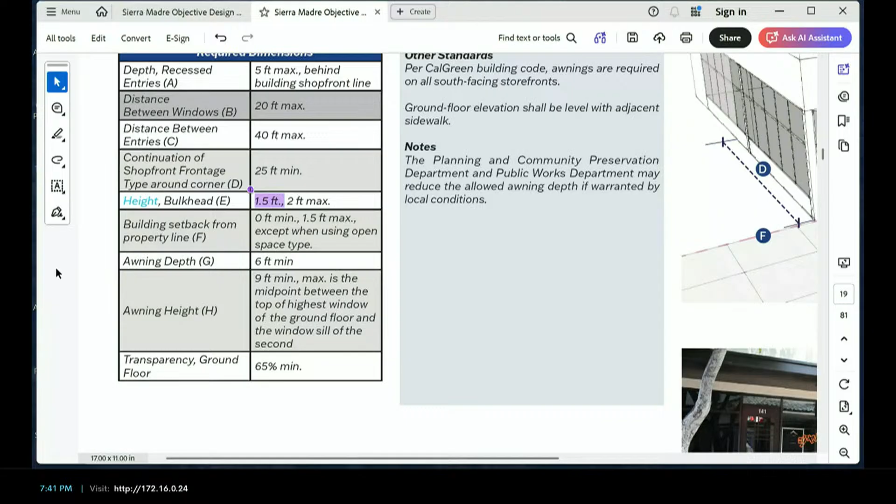2 feet? Really? Yeah, I think that's been 6 feet. So basically what we're saying is if you put an awning up, it has to stick out over the — I'm just using the example, real life examples here, right? None of our sidewalks are wider than 6 feet, so it's going to stick out most of the way over the entire sidewalk.

Yeah, we could go to 4 if it seems too much. Well, it's 2 for residential, right? If we go like to 8, I don't know, a couple more down, like A2 or A3, I forget the number.

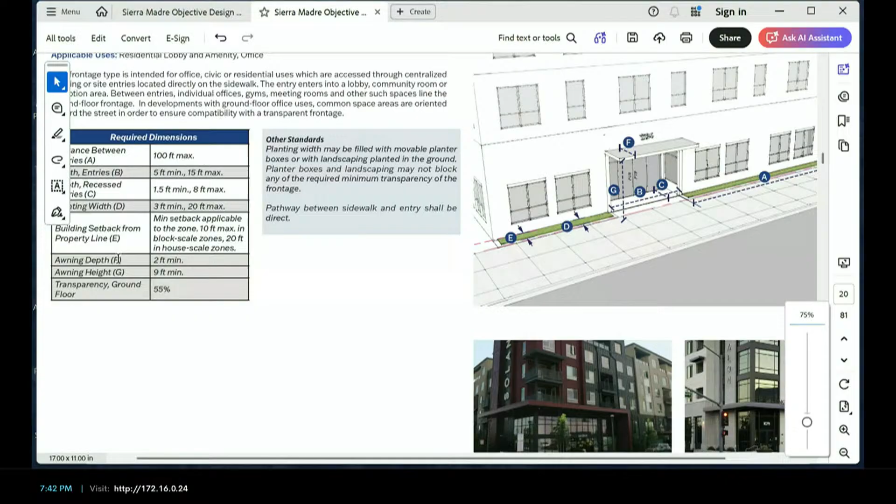Yeah, well, for common entries, it's 2-foot minimum. Right. That just seems like an incredibly... yeah, I mean, it doesn't — I did kind of know, like, in here, oh no, yeah, so we got, what, 2 feet here, 2 feet minimum.

Is this recessed 2 feet or 1.5 feet? That's for the common entry though versus — right. But I don't know, if you're just sticking something out, why don't we just stick it out the same for everything?

I mean, I think on Colorado Boulevard maybe a 6-foot awning makes total sense, right? But I don't know that we have our scale anywhere — our scale isn't, our scale is not the same. Downsized, so 3 feet.

Are you opposed to 2, so that I'm consistent? Oh, no, I'll do 2. I'll do 2, yeah, I think 2, because there are other ones too. Or the ones 2? Okay, yeah, so let's do 2. Agreed. 2. So that we're consistent. Okay.

And then awning height. So it's, and maybe I don't understand shop front — can shop front have a residence above it? Yeah, the frontage standards just apply to the ground floor. Okay.

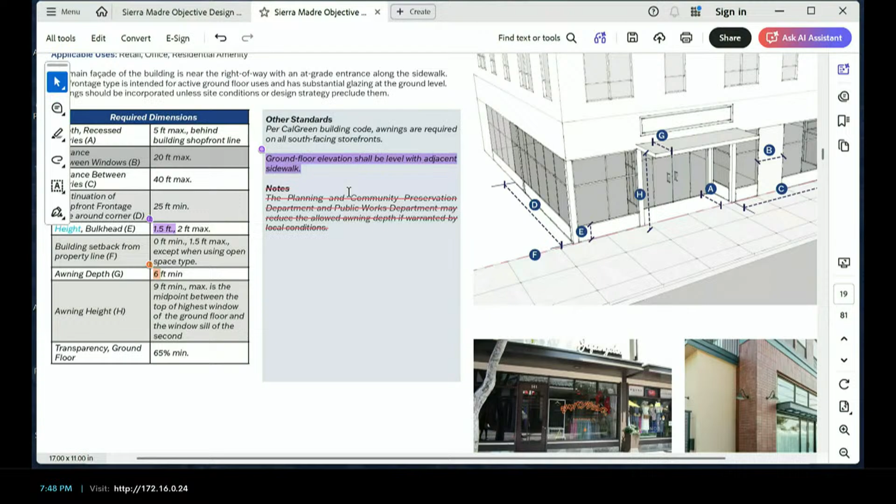I'm fine if we want to get rid of awning depth altogether. That's what you're recommending, is just getting rid of awning? No, I was recommending get rid of the note, where it says the Planning and Community Preservation Department and Public Works Department may reduce the allowed awning depth if warranted by local conditions.

Yeah, you're probably right, we could get rid of the notes. Because that would, awning's not 6 feet. We didn't even need to change it if we were going to leave it. Oh no, I was looking at the picture and that looks like it's about 3 feet, so we had a picture of 3 feet saying it needs to be 6, so, yeah, okay.

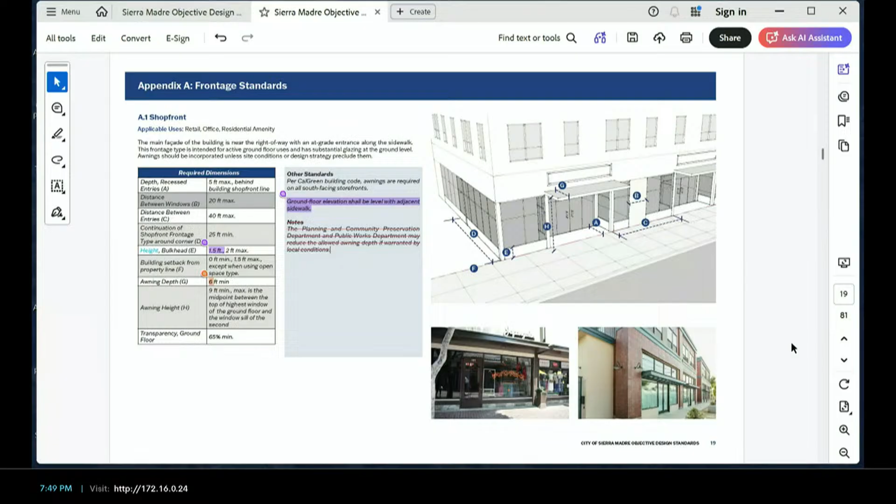A2? Are you guys ready to go on? Yeah, I'm ready to go on.

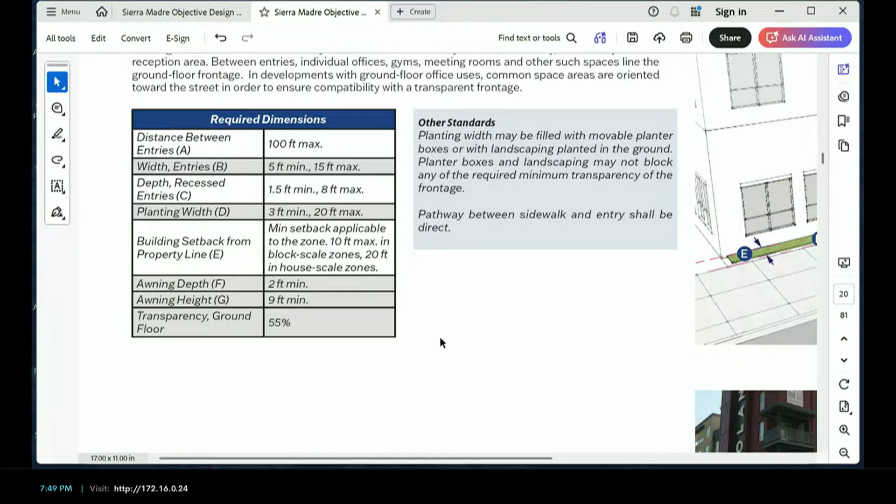Why is there a setback? Oh, it's a minimum setback applicable to the zone. Why did we not do minimum setback applicable to the zone in A1? I don't think you have front setbacks in those zones. I may be wrong, but I don't believe that's the case. But then, I guess what I'm saying is that if we say minimum setback applicable to the zone, then when we change the zoning code, that's what will govern rather than this.

Right? Yeah, let's see. If the objective design standards is silent on an issue, then the code governs. But if the objective design standard specifies it, then the objective design standard governs. So the shop front says 0 feet minimum, so that would govern for shop front. So we could really just remove the building setback from the property lines from both of those. The code is objective because it has an actual number in it. So this is not something that needs to be in the objective design standards, and we could leave it to the code to govern, in terms of the minimum. But the code does not specify a maximum.

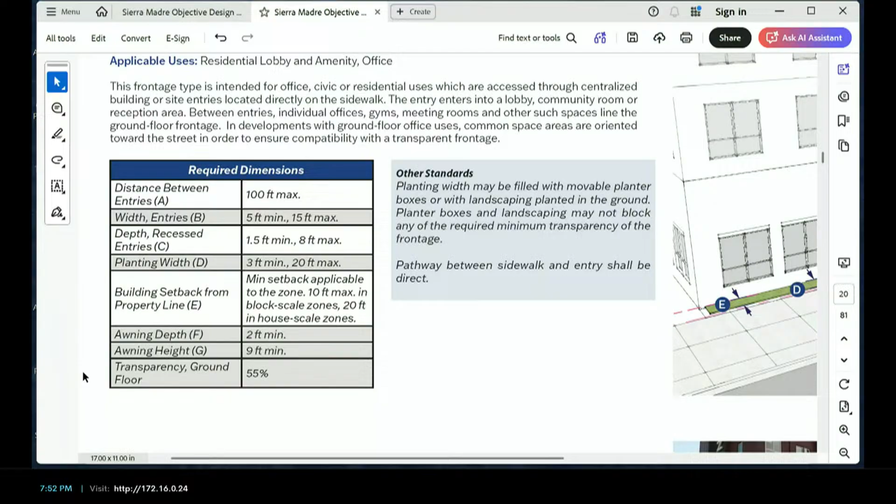Okay, well we can amend, it's easy for us to amend this when we do the other one and figure out if there's consistencies or inconsistencies that we need to deal with. So we'll take that then, unless there's an objection. No, I mean my problem was the planting width, but I think we've cleared that that's going to be covered under fire, not this. Because we are making them put in 3 feet for plants.

When the fire code is finalized, that can certainly be eliminated. It's actually something we've had a lot of debate about, whether requiring planting makes sense. In more urban conditions like New York, you'll see residential lobby buildings that are just straight up on the sidewalk. I get the setback part, and I like the look of that, but unfortunately...

We can always mess with that. It could also be changed, I don't know if landscaping is better, but allow it to be river rock or something in there. It's not plants, DG.

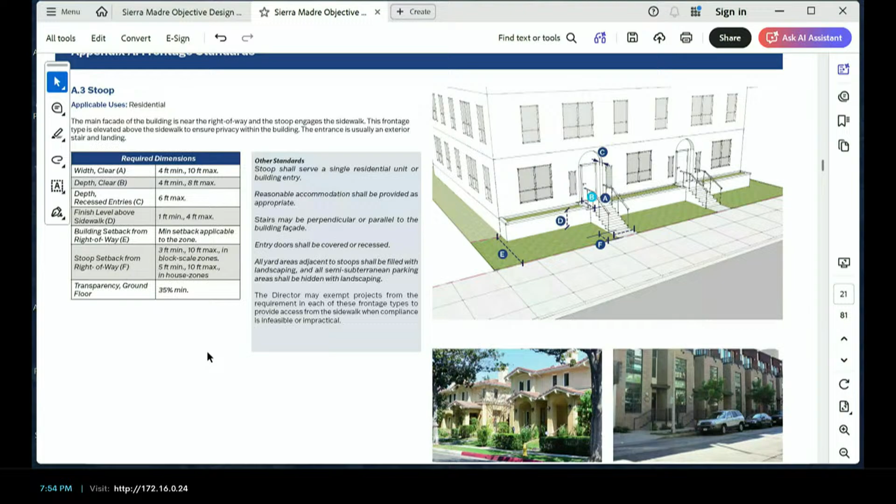I was curious, we're calling it a stoop. There's a 4-foot maximum. Why is there a minimum for a stoop? Is it just... I don't know, if we're at ground zero it's okay, but then we have to jump to one. It was for, I don't know, I think it's for privacy, right?

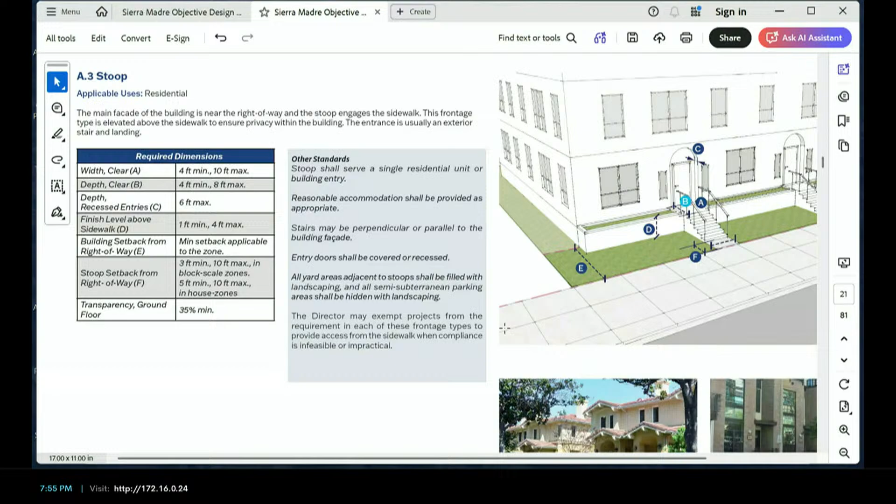If you're at zero, then you have to be under the patio frontage type, which has other requirements, it's going to require a wall around the edge, and so it's for privacy. Either you have it on your entry at grade, and you address the privacy by the setback and wall around a little entry space, entry patio, or you address it through the porch or stoop. I was a little confused, not confused, but between the stoop, porch, and patio.

The stoop and porch need some level of indication that you're transitioning from public to semi-public to private space. So having that elevation transition indicates that, in addition to the privacy comments that Phil brought up.

Are the stairs considered public space, and the stoop? I would consider them as the stairs and stoop being semi-public space. Not from a legal standpoint, from a design standpoint. I was just trying to figure out why the stoop made it to the public spaces and not the private spaces. I would think of a stoop as a private space.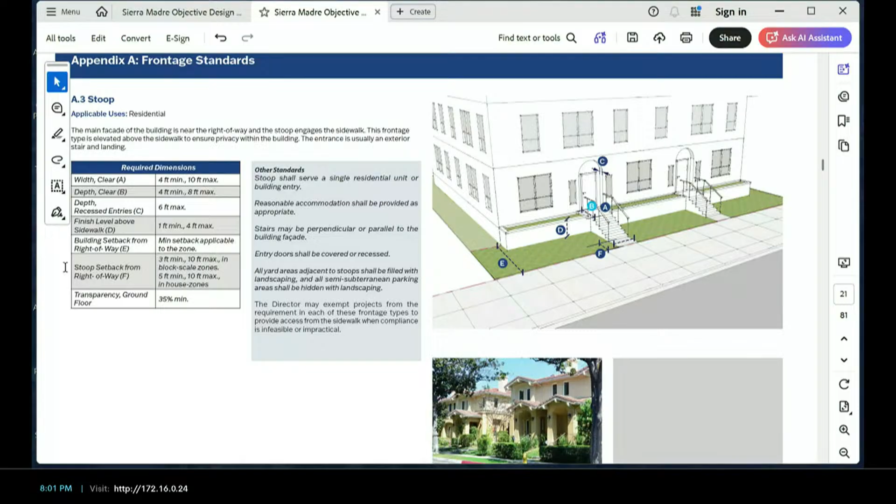Or was it, or here, sorry, this one, it's like 3 feet minimum, 20, I don't know. They just all seem different. I don't know why they all have to be so different.

I think that other one has a maximum, whereas the patio does not, but it's also 2 feet. I mean, the common entry could be 2 feet. That's not really a big deal, but the common entry is going to be used for higher density buildings, where you enter through a lobby, so bigger scale. Okay, that's a good reason.

Any other comments? No, just one I noticed, because I went to try and define all these terms. I went and found stoop and I found porch, but I didn't find patio. I think if we're going to define stoop and porch, maybe we should just define patio.

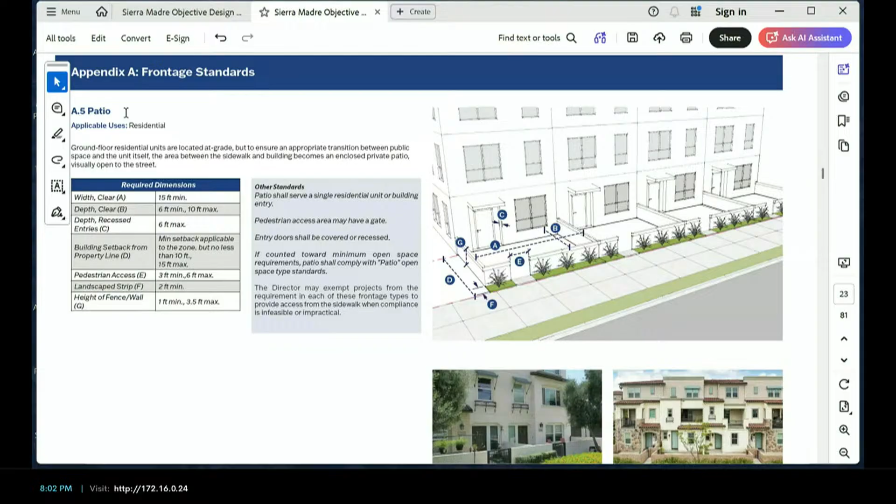It's C2 in Appendix C. Oh, maybe I missed it. It's in the open space definitions. A patio is also an open space type. Where's it in the appendix? As is a porch, actually. Porch is in C5, Appendix C. Oh, it's there. Okay.

Sorry, I looked in the definitions. But to that point, does it make sense to consolidate all the definitions within the definition section? Because porch is in there. It's a good question. Either they should all be in there, or they should all be referred to the appendix, because defining them twice is confusing. I'd have to look at the definitions, but if we have an entire appendix page dedicated to each of these types, it seems like that should be the definition of them. Right, and just take them out of definitions.

Or I'll say that in just the open space types, this kind of descriptor at the top is a definition, but it's also kind of an intent or why. Like for C1 balconies, the second sentence says it serves as an extension of the home, bringing the outdoors in without requiring a yard, making it ideal for urban living conditions. That's not really a definition. Well, it says it has to be 6 foot deep and 15 foot wide for patios. That's kind of definitional.

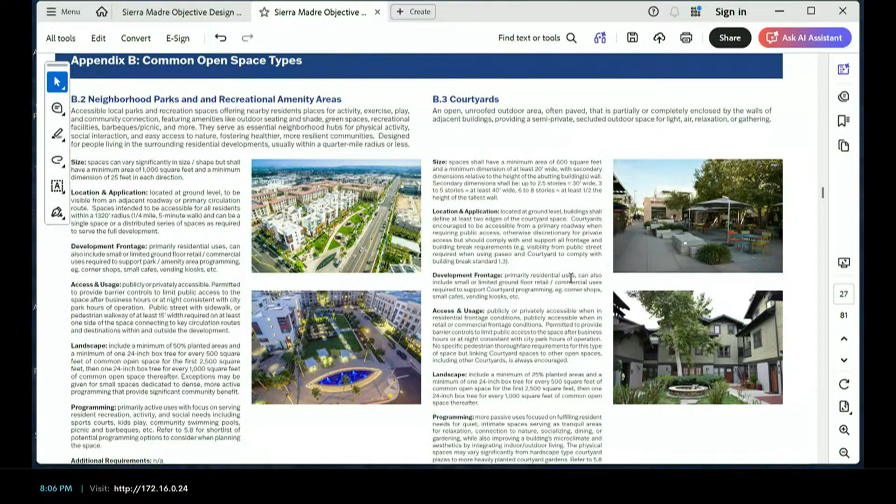Sorry, I wanted to point something out, but I'm moving around the document inappropriately. Let's see.

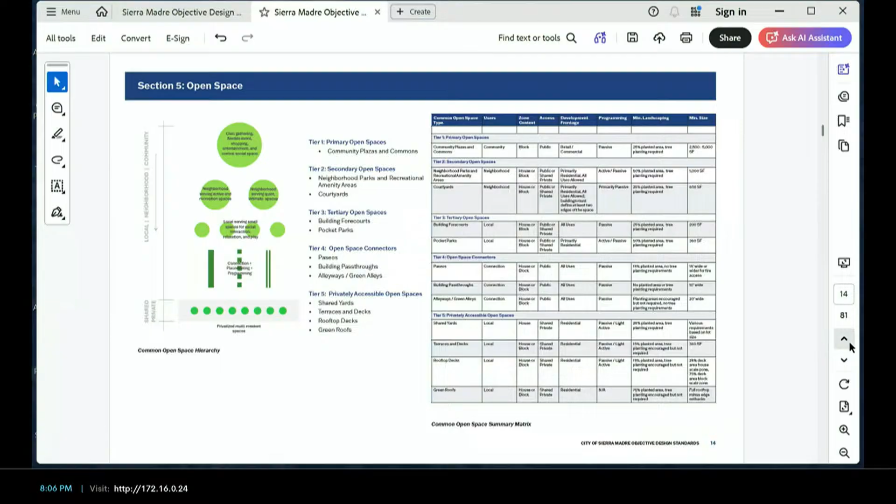I was having trouble tying out the references for Appendix A, A.7, where it says other standards. It says structured parking garage frontage taller than 20 feet, if allowed, shall be screened or enhanced as described in 3.15, and I couldn't make that reference work. I think maybe the same issue for the reference on the surface parking other standards, A6, referencing section 410. Maybe something got updated along the way and the section references dropped.

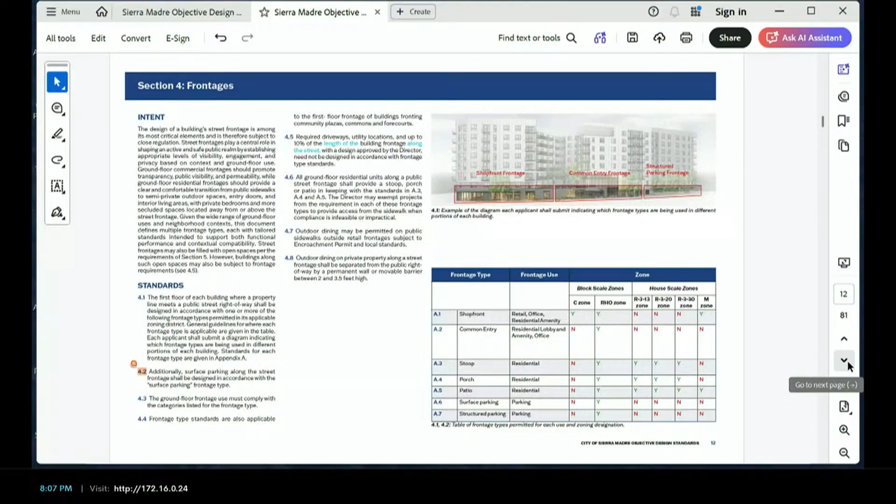Yeah, we probably should scrub the whole thing once more, because we're going to be eliminating some standards now and renumbering everything.

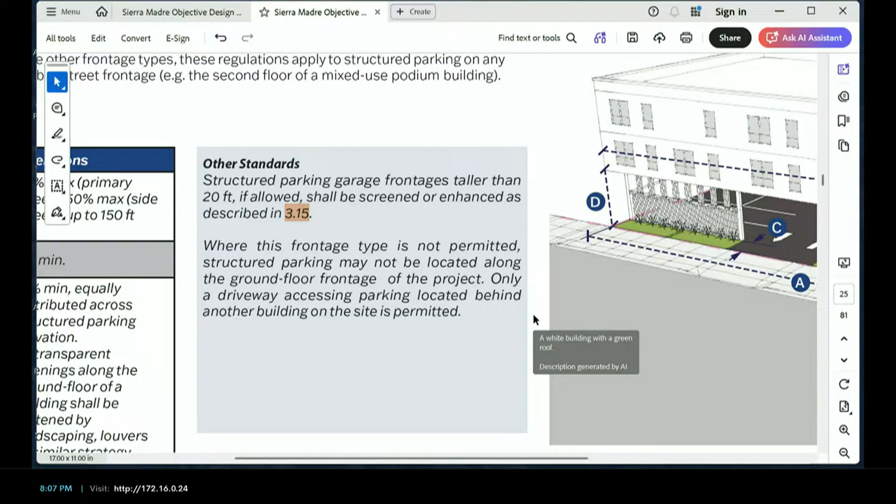I do have a quick question for staff. Which locations can these be in right now, in what parts of town? I know it's like our commercial district, our industrial district. Yes, those districts plus the multifamily residential zone districts, R-3-13, R-3-20, and R-3-30, and the religious housing overlays as well. And that is generally Baldwin, most of the way up to the top.

A fair amount of Highland, extending out from Baldwin, and Esperanza, Suffolk, obviously the west part of Sierra Madre Boulevard, and portions of Montecito.

Actually, I could just look at the zoning map. I don't think any of the commissioners have gotten updated zoning maps in a while. It hasn't been updated in quite a while, but I can definitely send one. I think the last time they were handed out was before any of the commissioners before myself were here. So we should probably get them all a copy of that.

Yeah, so Suffolk, portions of Mariposa, portions of Montecito, north of Highland, there's Victoria Lane, portions of Mountain Trail, portions of Laurel that are east of Baldwin. And there's one small parcel, just kind of one carve out for East Sierra Madre Boulevard.

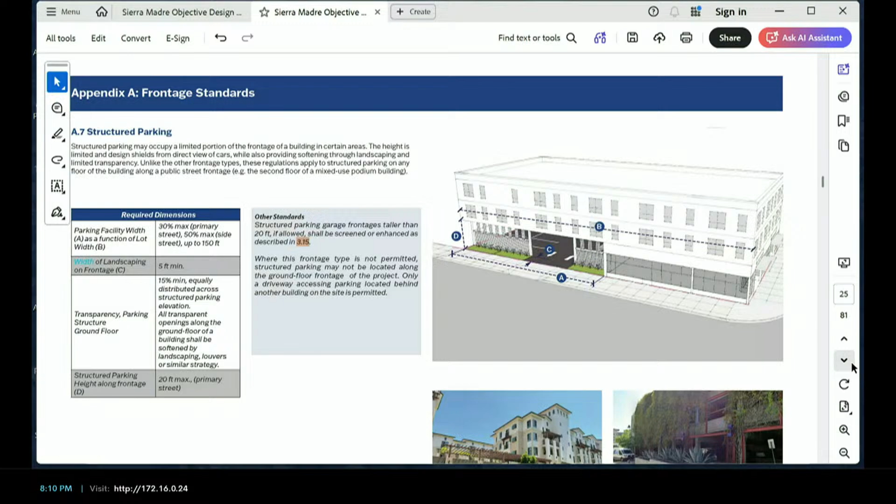Okay, so I think I heard in the definitions that we were going to take out the ones that have an exhibit of their own. So that would be porch. Oh, I should probably start on the A's.

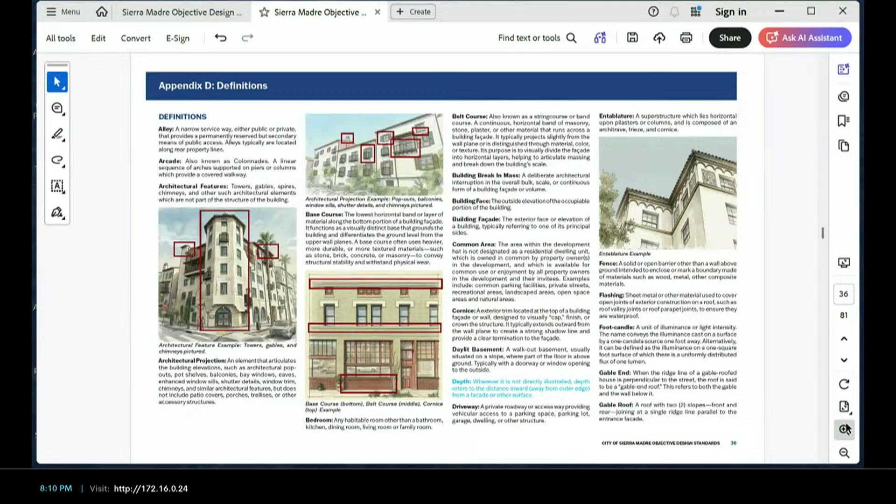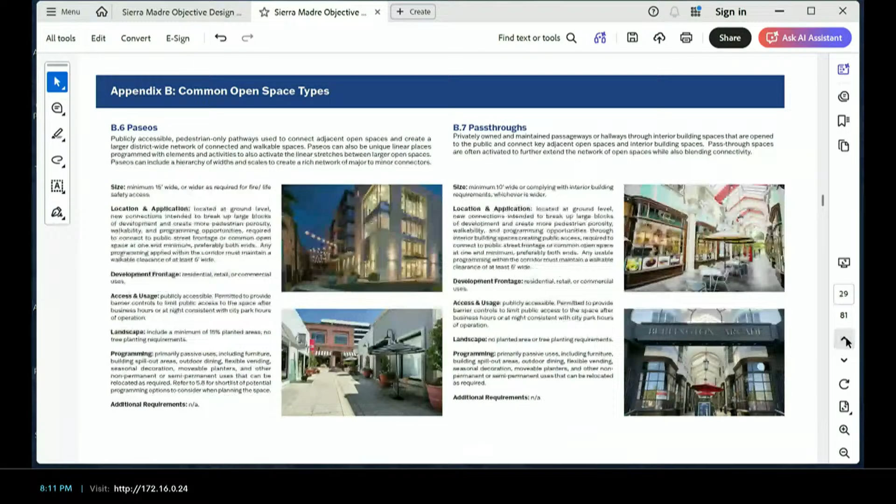Was porch the only one that was in there? I think it's the only one, because the stoop isn't an outdoor space. Stoop's defined in there too, so porch and stoop. Well, but stoop isn't defined anywhere else. Stoop's got a whole page. Does it? Oh, maybe I missed that. A3. I think it was A3. Oh, sorry, I missed that. Yeah, A3.

Yeah, then we could take that out. There are things in the definitions which probably would need to be added back into the standards pages. For example, the porch definition says it's open on all three sides, I think. So just make the one, if there's something in this, literally three sentences, that needs to be in the other half of a page, I think we could pretty easily add that in there.

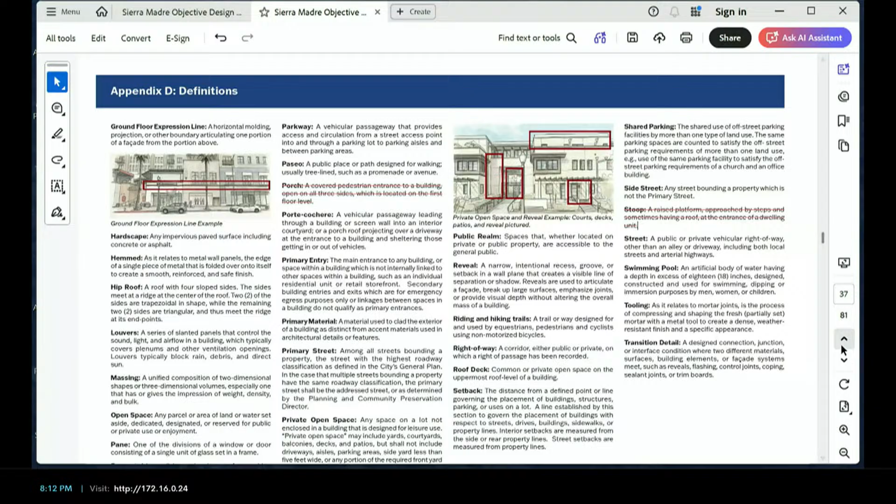And on your question on rooftop decks, since you brought that up, I see there's a number missing in B11 rooftop decks under size. It says maximum, and then it's missing a percentage of total roof area for projects in house scale zones, 75% of total roof area for projects in block scale zones.

Because I know we had a discussion with city staff about this and whether rooftop decks should even be allowed in house scale zones at all. And I think we settled on allowing it, but having it a pretty restrictive percentage. I apologize, looks like that number somehow got deleted - terraces and decks, maximum - but it might have been 25% or something like that.

I have no objection whatsoever to confining rooftop decks to the block scale. Me neither. Okay, we can eliminate it then. What do you think, Commissioner? I'm fine with it. Okay, so let's make the rooftop decks confined to block scale. It's a great point, and that takes care of it. I like that.